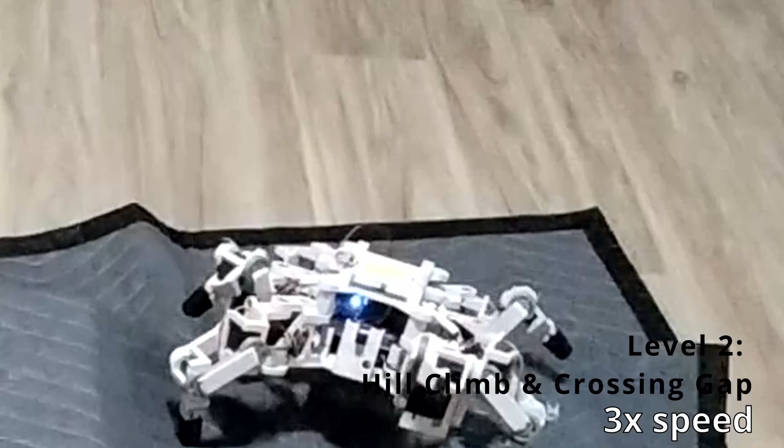I've fallen and I can't get up.

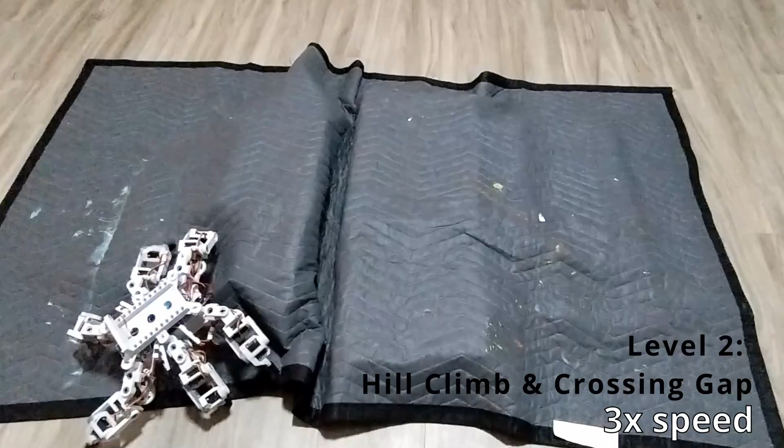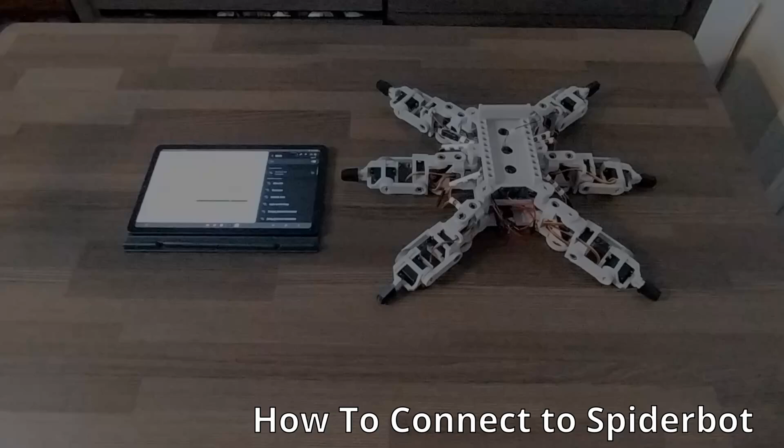The first thing you want to do is turn on your Spiderbot. Okay, so now it's on, you can see the lights are on. Then you wait for the Spiderbot network name to show up. In this case, it's ESP32 Spiderbot. Connect to it.

To check that it's connected, we hit the refresh stream button. Okay, now we can see the camera stream. So now we adjust the camera stream so we can see the full picture, zoom out.

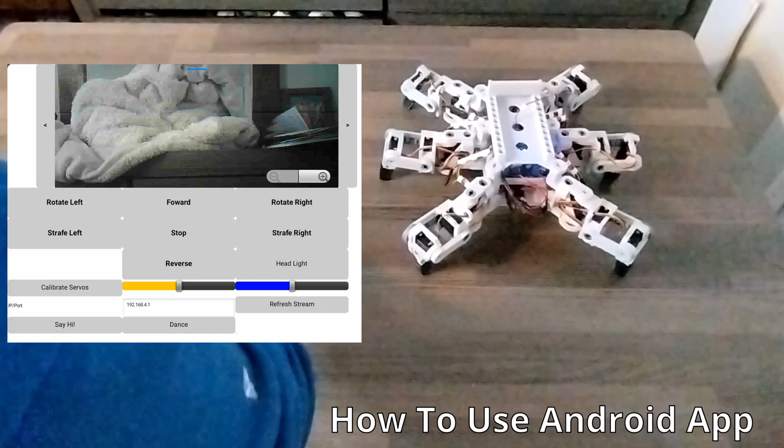Then we'll have to adjust with these arrows on the side, adjust so you can see the black bars. Okay, so there we go, full screen.

So you can also test out. The headlight button obviously turns on the headlight. The yellow bar here is for speed. You want to adjust this while it's stopped, otherwise it kind of glitches out.

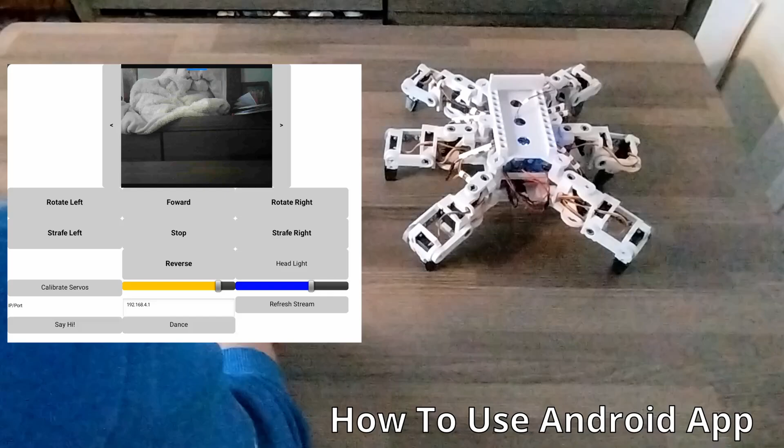The blue bar here is the walking height. You have to hit stop first to send the first command, and then it will adjust based on commands after that, so we can adjust the walking height.

Obviously there's forward, stop, reverse, strafe left, strafe right, forward, rotate right in place, rotate left in place. We have additional commands, say hi, and dance. Those are just fun actions.

We have a calibrate servos function, so that will set all servos from 0 degrees to 45 degrees. You can use this when you're assembling the Spiderbot to ensure everything is at the correct angle it should be.

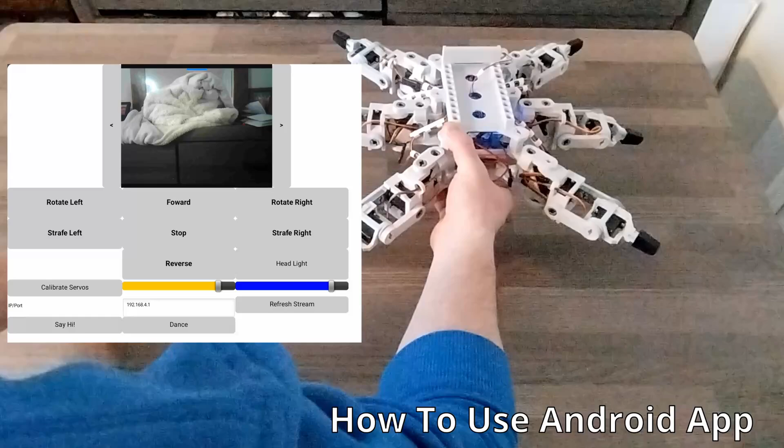Stop. And then at the bottom here we have the IP address, so that's the IP address of the ESP32. Since it's creating its own access point, it should be the same IP address every time, so you shouldn't have to adjust that.

This is the Spiderbot bill of materials. You can see here at the total, we have an estimated cost of 351 Canadian dollars. And you might think, well, that's kind of expensive, right?

Well, if you have 18 servos in a robot and a servo controller to control them, it's going to be kind of expensive, because if you cheap out on those components, your Spiderbot will not work very well. I've learned this from personal experience by just doing that - buying cheap servos, buying cheap servo controller boards. And yeah, it will kind of work, but it will just be not as good quality. It's just worth spending a bit more money on getting high quality servos and a high quality servo controller.

But anyway, so we'll just go through the list real quick of everything on it. Obviously we have the ESP32 cam, the microcontroller that controls everything. You definitely want to get one that has a programmer board with it, that's USB - it will make your life a lot easier.

The servo controller itself is the SSC32U, not much to say about that, definitely need that. So I use Goteck servos, they're like 2.5 kilograms of torque I think. They're really good servos, very durable, which is important.

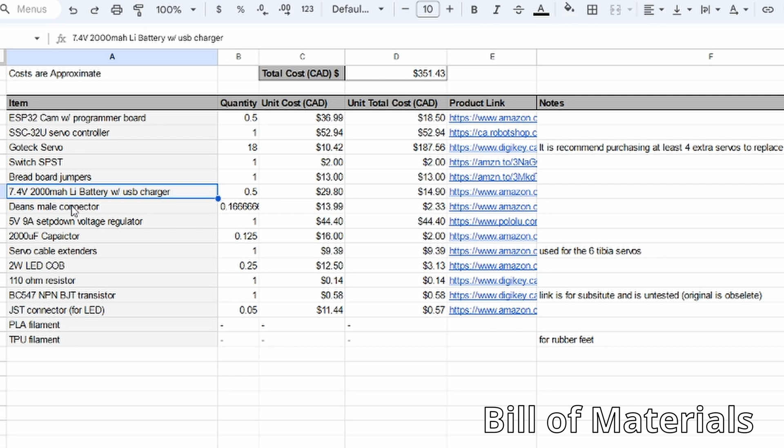We're going to need a single pole, single throw switch to turn the Spiderbot on and off. We're going to need breadboard jumpers, just various ones for various connections. I would just recommend buying a whole pack of them, because it's always good to have those for really any project. We have our battery, just a regular 2000 milliamp 2-cell 7.4 volt battery. We're going to need a battery connector, so that just interfaces with the battery.

We're going to need a voltage regulator, 5 volt 9 amp step down, and of course all the links here are right here for the items. We're going to need a capacitor, so that's for the bypass capacitor for the ESP32 cam, to make sure it doesn't brown out, especially with servos drawing a lot of power, potentially 18 of them.

Servo cable extenders, I recommend getting some of these for the tibia motors or servo motors, so you're going to need 6 of them.

2-watt LED - this is optional, of course, the LED light bar, but I think it looks cool and useful for nighttime environments to have the LED. So the resistor, the transistor, the JST, those are all supporting the LED, so that can be controlled by the microcontroller.

And of course we have our filament. So for this, pretty much the entire Spiderbot was printed with PLA filament, and TPU was also used, but only for the rubberized tips of the feet.

The tools used for this project were a 3D printer, to print all of the 3D printed parts, precision magnetic screwdrivers to screw in the servo screws, a soldering iron for building the circuit and making connections where necessary, wire strippers to strip insulation and cut wires, and pliers, which may be useful for assembling and disassembling the parts of the Spiderbot.

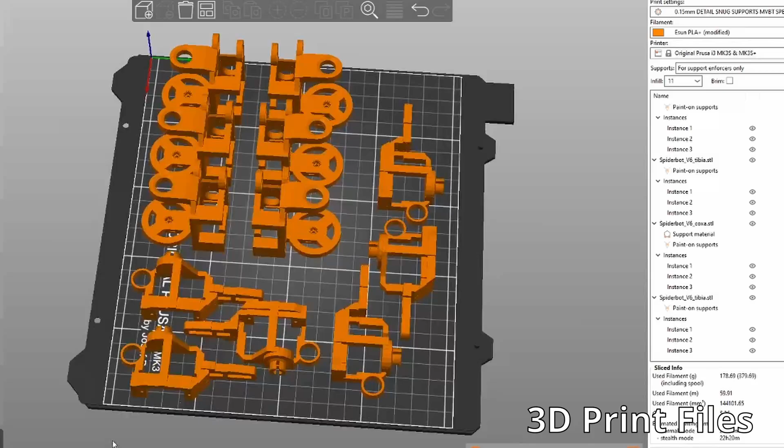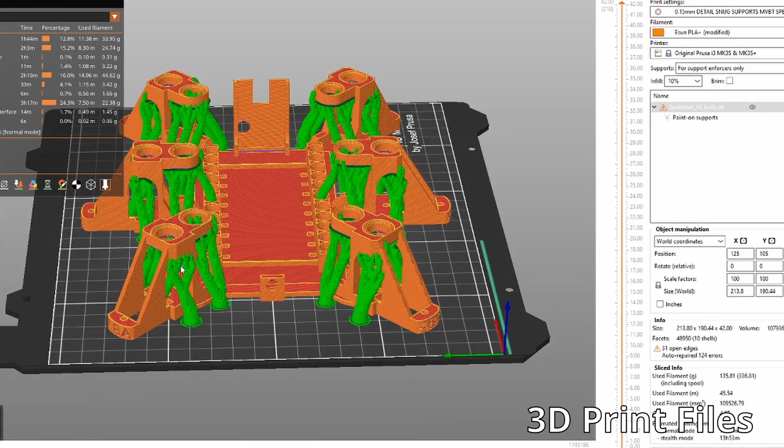Brief overview of the slicer files for 3D printing. So we have the leg pieces here, and we can see that we use some organic supports for the coxas, and then just regular snug supports for the tibia. Next we have the body of the Spiderbot, the main frame, with organic supports used for all these pieces. That's what I would recommend to do.

Here we have leg pieces, linkages, and connectors. All the connectors are round, so therefore they have supports.

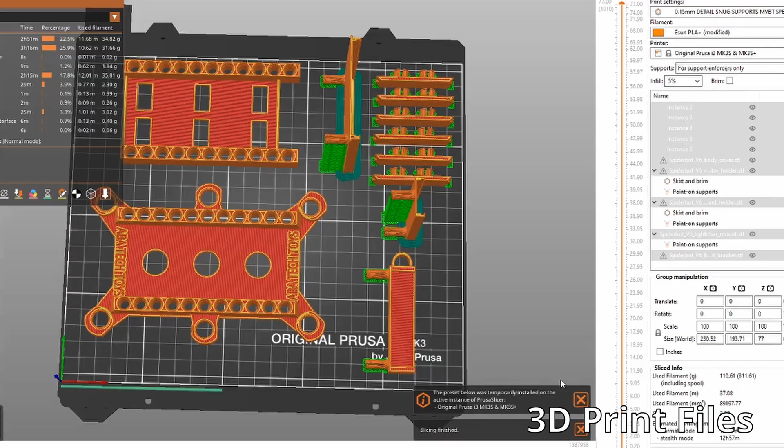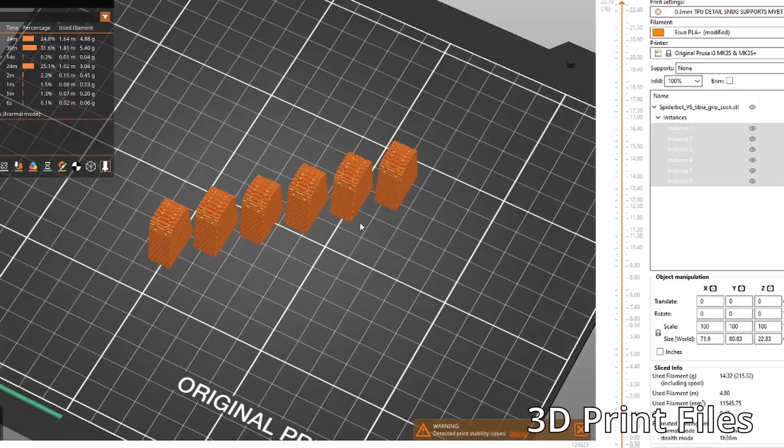Here we have the top piece, the electronics mount, some electronics mounts as well, and some linkage covers. You can see here the pegs are supported vertically for these electronics mounts. And last we have the tibia feet, which are printed in TPU, that's why they have their own plate.

On the document overview we have the 3D print list. This just has all the part names as well as what material they should be printed in and some printing notes. The files are available for download at Maker World, and the link is in the project overview.

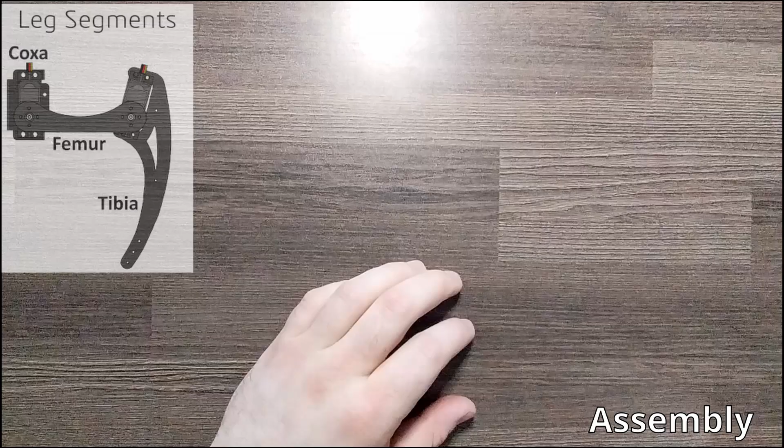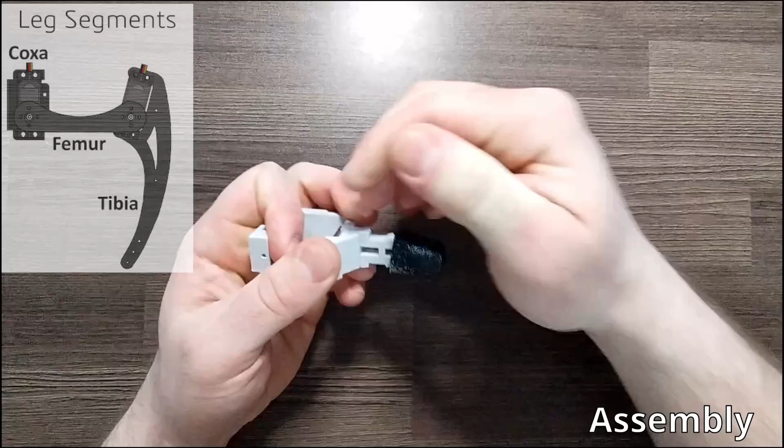All right, we're going to start with the assembly of one of the legs. This will be repeated 6 times, mirrored twice, so 3 legs will be the same, 3 legs will also be the same, but not all the same, only because they were mirrored left to right. First we want to start with our tibia piece, and we have our tibia sock, which just slides into there like this. It should snap into place and be very hard for it to come off.

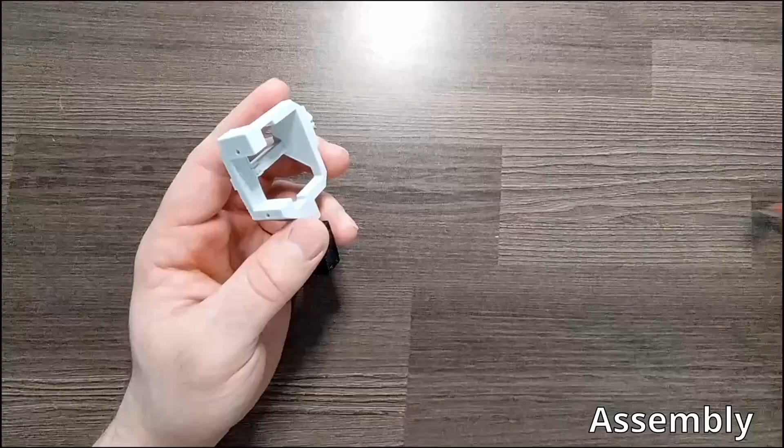Next we're going to want to put our servo in. We have a servo already prepared with a servo extender, just because the normal servo cable length isn't long enough only for the tibia. You only need these for 6 of these, for the tibia piece. You want to install the servo with the head to the top, furthest away from the rubber foot. It should slide in and snap into place, especially the first time if you've never done it before. The newer 3D model actually has a loop here for your cable to go through, just to keep it more managed, but it's not on this current piece - you would do that if you printed out that version.

First, we're going to grab our precision screwdriver here, and screw in the servo mount screws - these are the bigger ones. Okay, one down, and then the second one. They should line up with the hole that's already printed in there beforehand.

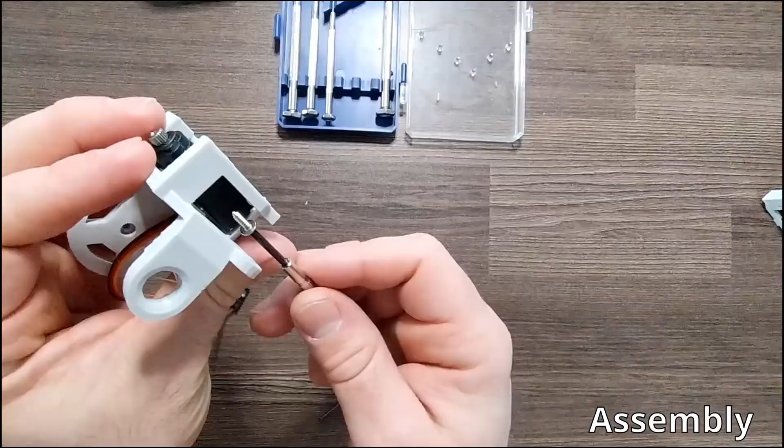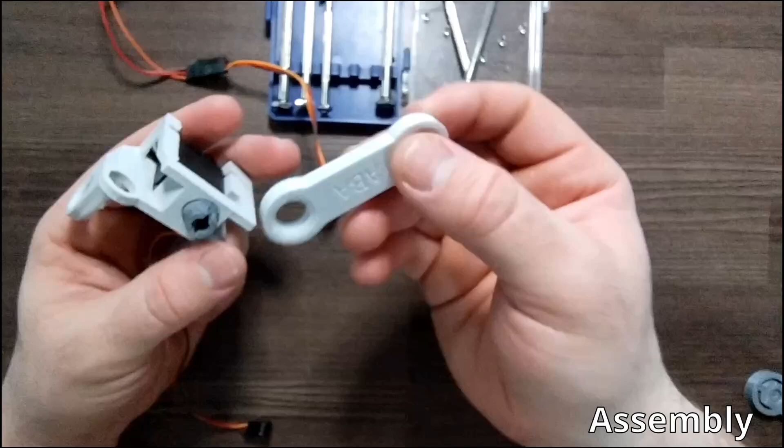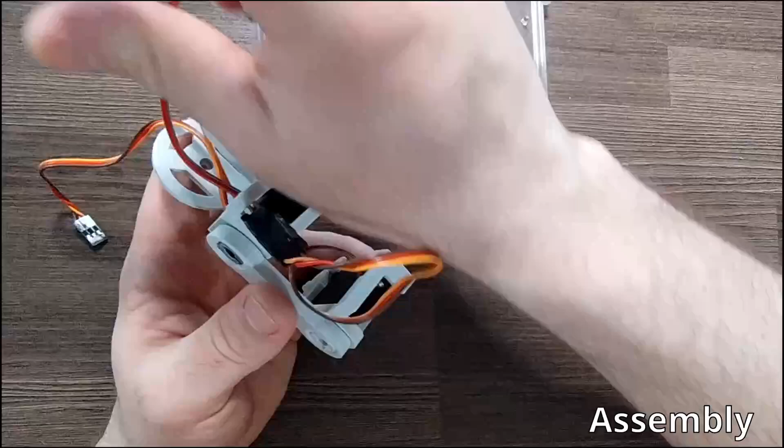All right, we have our servo installed. Get the femur connected, but we're not going to fully connect it, just on one side. We'll have one of the connector pins here that's going to go into the side of this coxa piece. Then we have a snap connector that goes onto this, and the other side of the snap connector goes onto the tibia. So for the tibia, you want to feed it through this loop right here - on the newer version, I think there's 2 loops, so just feed it through both of them. Pull it through, and there we have the assembly for now.

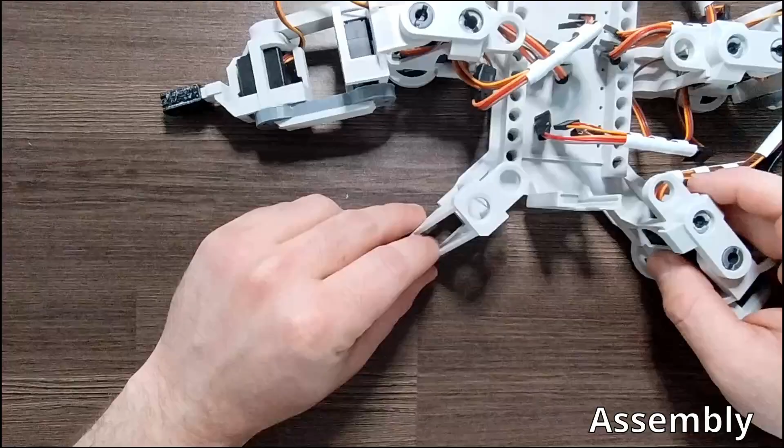The next step is to install the coxa servo on the frame of the Spiderbot. In this case, I already have all other 5 legs installed, but they're all mirrored. First, we'll take the servo and feed the end through this, whatever it's called. Okay, pull it through, you can see.

So now we're going to want to take the servo head and put it in this way. It should fit right into the square slot below - might be a little tricky to get in there. It's easier if you go this way first, this end, like this, and then push it down. It should snap into place. You can see here, the end of the servo head is closer to the edge. So now we'll just put our screws in, like before.

Then you want to put the screw through this hole to reach the hole for the screw. It's going to be a little tricky.

Alright, there we go, the servo is installed. Since we can't go any further with installing the servos, we have to assemble the body. That's because to go further with assembling the servos, we need to have them at 0 degrees in order to assemble them. Obviously, if your servo's not on and powered and set to 0 degrees, when you connect the parts on, 0 degrees won't be correct in terms of where the servo thinks 0 degrees is, so your robot won't work correctly, so that's important.

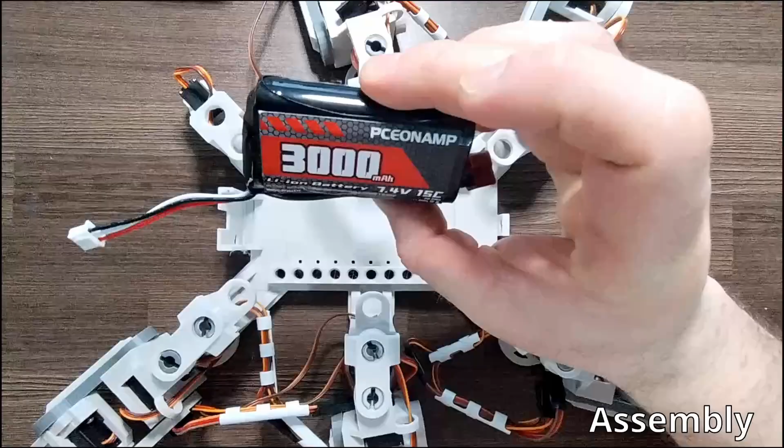Alright, so just imagine these legs aren't installed yet, obviously other than the servo on the end here. So we have our main body here, so we're going to want to start with our battery. This is a 3000 milliamp hour battery, with a JST connector for charging. I put this out of the front so it's easy to access. And here is the main connector we use to power the rest of the Spiderbot, so we'll set that in here.

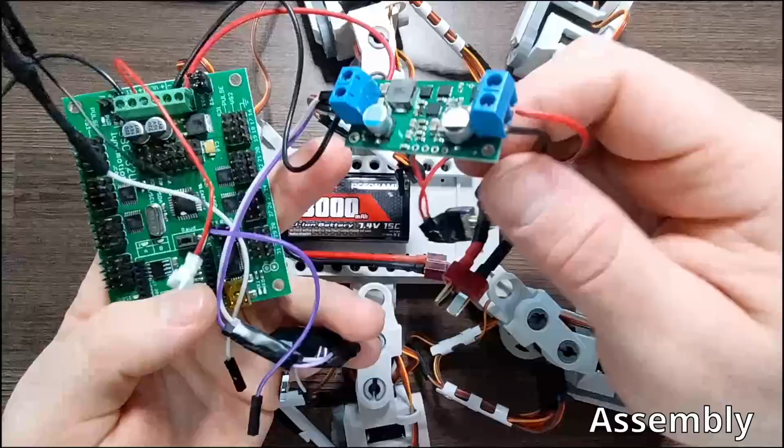I have the circuit already assembled. You guys can figure this out from the circuit diagram. It's really very simple, but I'll just show you real quickly.

So we have obviously the connector to the battery here. The positive is connected to a single pole, single throw switch, which turns the Spiderbot on and off. Then the positive and ground are input into this 5 volt 9 amp step down voltage regulator. Both the servo board and the ESP32 are connected directly to the voltage regulator.

I just don't have the ESP32 plugged in. For the ESP32 we have the bypass capacitor here, which can prevent brownouts. As you can see, we have it pretty close to the leads that connect to the 5 volt and ground on the ESP32. And here we have the BJT transistor that's used to toggle the headlight on and off.

So first we'll connect the connector to the battery, like so. Make sure that's off as well, make sure your switch is off, no need to have that on. The switch has a thread on it, so it goes through this little mount here at the back, you just push it through. And then we're going to put the washer and the nut that comes with it on, just to hold the switch into place.

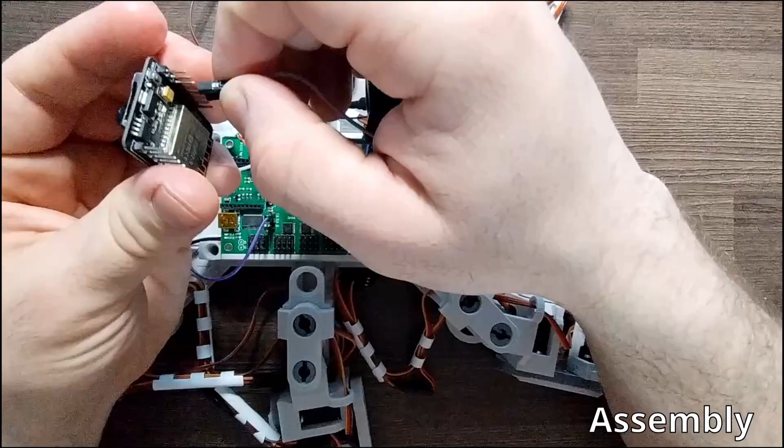Don't forget to also connect your VL and your VS pins, so that is these two right here. They just connect the voltage for the servos and the logic voltage together, because we're powering everything off 5 volts in this system. Okay, so next we're going to install our ESP32. We have the special wire here, the 5 volt and ground with the capacitor, going to connect that to 5 volt and ground on the ESP32, of course.

We're going to connect the receive pin of the servo board to the transmit pin called U0T on the ESP32. Then we're going to connect our BJT transistor to pin 4. Just a note, pin 4 also activates the LED on the ESP32. I use pin 4 because my voltage regulator for it burnt out, so it doesn't work anymore. But if you want to keep that flashlight on and put it on a separate pin, you can just connect it to probably pin 16. You'll just have to change that in the software, but it's no problem.

Okay, so once your 4 wires are plugged into the ESP32, it slides into the mount at the front. It should sit in there nice and snug and not come out.

Now the next step is to connect our servos to the board, and that will allow us to make sure they are connected at 0 degrees.

In this case, the orange wire goes onto the pulse, which is the inner row here. Now we're going to bring over our leg that we partially assembled, and we're going to connect it as well to the servo headers.

Might be a little hard to tell what's going on here because it's so small. Alright, connect that, connect that.

So if your ESP32 is connected, it will set the servos to 0 for like 2 seconds, but then they'll go to the default standing position. So this is where we have to connect our app for the calibration.

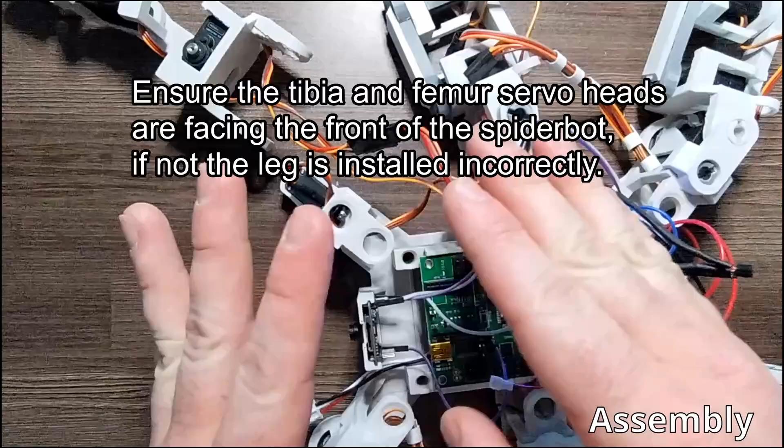Set it to 0. Now we can assemble the leg. Make sure all your servos that you're connecting are powered. That's very important, okay? So now all the servos are at 0.

So we're going to connect the coxa to its servo head hole, whatever you want to call it. This is important when you connect it because you want to make sure it's aligned with 0 degrees. 0 degrees in this case is going to be like straight out where the leg is pointing.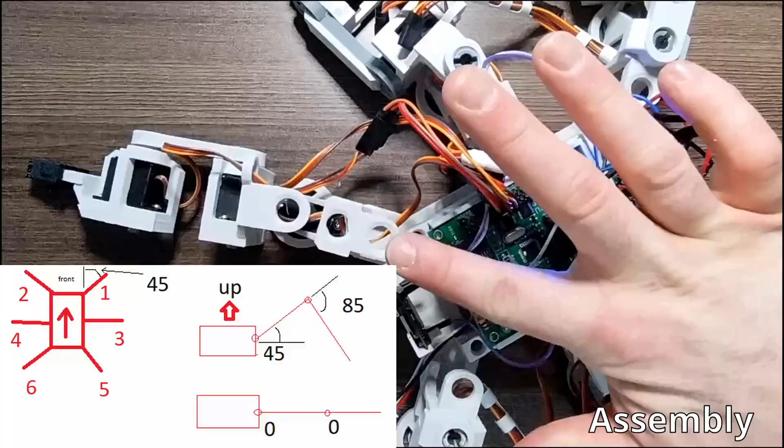So you can see here that from the body it's like 45 degrees off from the rest of it. So you want the rest of the leg to be straight with that. So I'm just going to keep adjusting it. You might have to pull it on and off until it looks good.

Also, when you're installing this for the first time, the fit might be really tight, so you might want to use a heat gun to heat up the part for maybe 1 second or so, just enough to loosen it, and then you fit it onto the servo and it will cool down, and then it will have a nice good fit, just if you can't get it to go on.

Okay, so that looks about 0 degrees, right? Okay, so the next part is to connect our femur.

Okay, so again, actually we're going to connect our coxa first, just so it doesn't fall off, because I feel like it's going to.

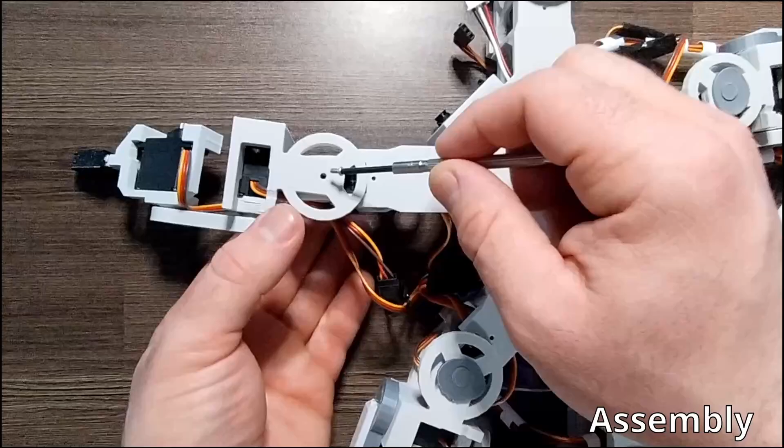So we're going to use one of these little tiny screws. These are called the servo head screws. Okay, make sure it's screwed in there nice and tight.

Then we're going to put this connector on. This protects the screw from falling out, because eventually the screw will loosen a bit since it's moving left and right with the servo. So I put this on to prevent the screw from falling out. So even if the screw is loose, at least it's not going to fall out and you'll lose it. Okay, so it should snap into place right there.

Okay, now the next part is to connect the femur. So again, we're going to want them at 0 degrees. In this case, 0 degrees is if the leg is straight out like this.

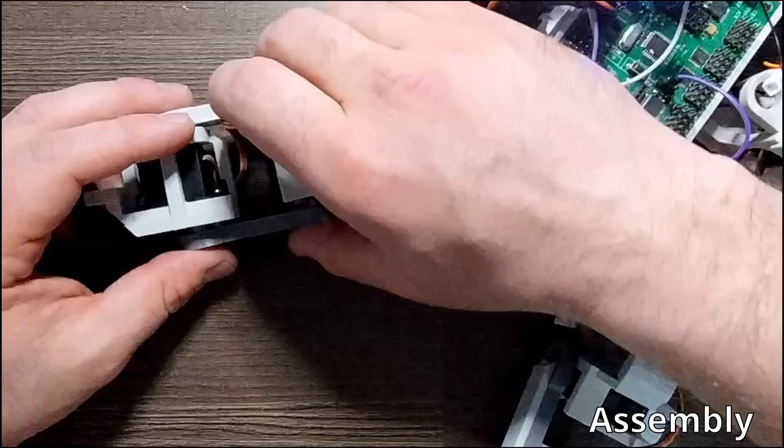Okay, so when you go to put that femur on, you want to make sure it's as straight as possible, because otherwise your robot will walk funny. Okay, so that's in place. Now again, we have to connect the 2 servo head screws.

Alright, so once you got your servo head screws in, you can turn off your robot. You don't need that on anymore. That's assuming you've installed all the legs.

So the next part is the screw covers for the femur. You can see here there's these 2 holes. This snaps into here, and this will also protect the screws from falling out if they got loose.

Next is the coxa swivel connector. So we have this guy and these 2 pins right here, and they snap into place like this. Then this end with the flanges goes around the static body mount, and then this connects to the top of the coxa. You can see here, it should freely allow movement left to right, no resistance.

So at this point, you should have all your servos connected, and your robot should be technically operational at this point, so there's not much left to do. For this demo, we'll just move ahead to the end.

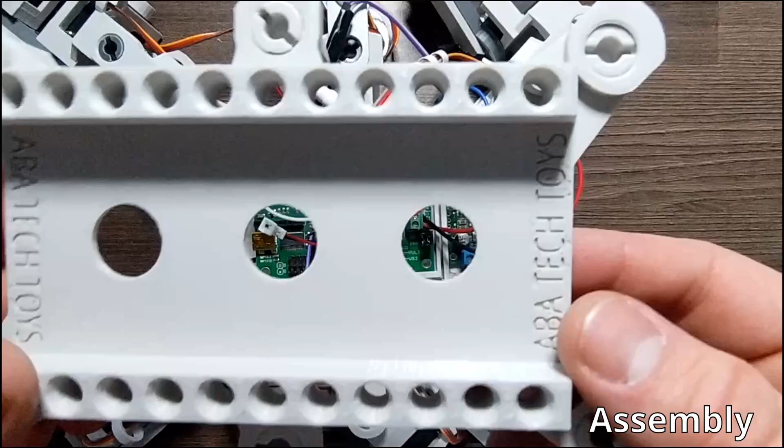Okay, so next we're going to snap the top plate on, that's the cover. But first we're going to put the JST connector for the LED in here, as such. And then it should snap into these 6 holes that we have here, ready to go.

Make sure they're snapped in all 6. All right, it's mostly assembled. The last thing is to put on the LED light bar.

So we have this 3D printed piece. So the LED, just like you can see, here's a slot, it just slides down into it. Let me see, yeah, like this.

And you can see I have the other side of the JST connector already connected, and I have it looped through this little loop here just to keep it intact so it doesn't get ripped off as easily.

So, okay, slide it back in. It's a pretty tight fit, so you really got to force it in. Okay, so then that snaps onto the top rows here into these holes like that, nice and secure. And then we connect our JST connector.

So we'll briefly discuss the electronics schematic. Overall, it's pretty simple. We have our servo board here with the servos connected, and what servo headers they should be connected to. And then we have the microcontroller, the LED circuit, the voltage regulator, and the battery.

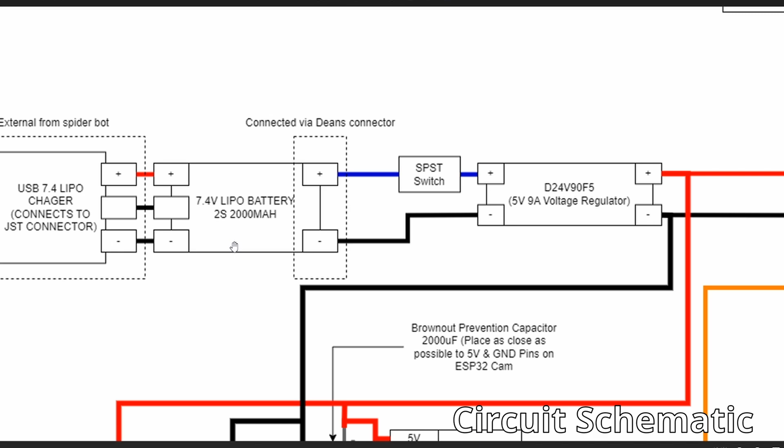So a more detailed explanation. We have the USB charger that comes with the battery that I linked in the bill of materials. So this is disconnectable, so this is external to the Spiderbot. Then it's connected via a Dean's connector, that's the special connector that's listed in the bill of materials. Then we have a single pole, single throw switch connected to our voltage regulator.

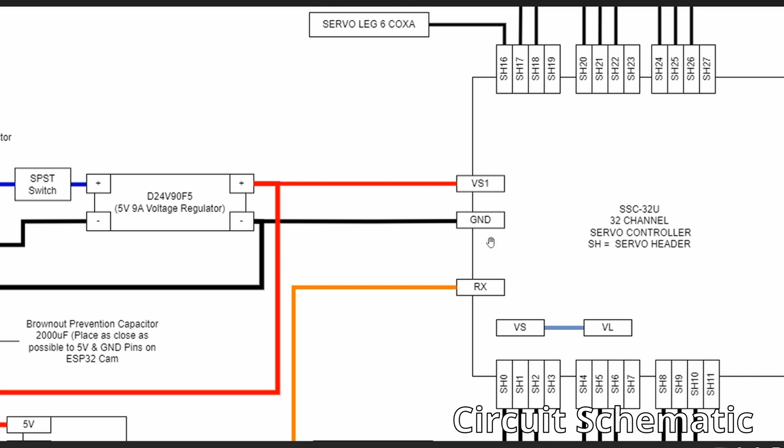So our voltage regulator, the output's connected to VS1 and ground on the servo controller board. And the 5 volts and ground is also connected to the 5 volts and ground on the ESP32 cam. And it's also connected to the 2-watt 5-volt LED. And here we have our transistor, which is controlled by pin IO4, along with its biasing resistor, 110 ohms.

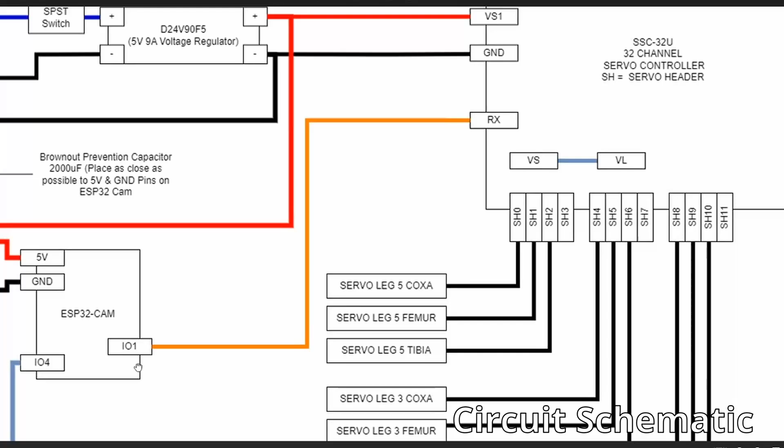The port IO1, which is also the transmit pin, is connected to the receival pin on the servo controller. So overall, it is a fairly simple schematic. And that was the design from the beginning, was to make this circuit as simple as possible to assemble, which I believe was completed with a 5-volt system in mind.

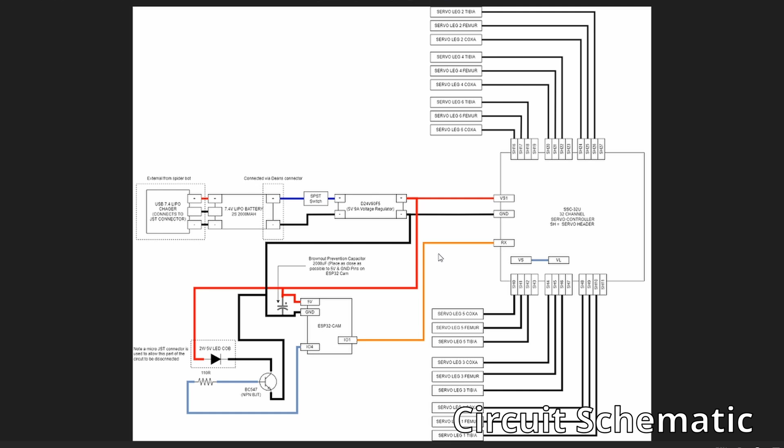So the voltage regulator powers everything. There's no need for 2 separate voltage regulators, one for 5 volts and then one for 6 volts for the servos.

But of course, if you don't want to edit the app, there's no need to at all. You can just download the APK file onto your Android device from the project overview, and you can just install it, and it should work right away. There should be no problem. But I would like to offer anyone that wants to customize their app should be able to.

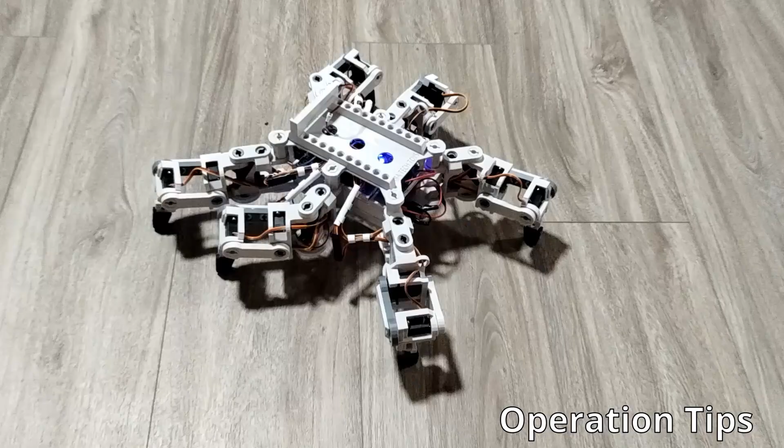Another thing to watch out for is make sure the wires of the servos are not getting bound in a part. It is possible for the wire to get stuck and possibly get sheared off, so just keep an eye that it doesn't happen.

Some ideas for expansion onto this build would include adding 2 servos for panning and tilting the ESP32 camera, so the robot could look around, because right now it's stationary to the body. I think being able to look around the environment would be useful.

You can also build custom attachments. If you look at the light bar, it's actually attached by a pin connector, so you could mount your own sensors or electronics to the top of the Spiderbot using the existing pins.

I think another improvement would be utilizing inverse kinematics to fully leverage the full 18 degrees of freedom that the Spiderbot has. For this project, I found that it was going to be too complicated to implement inverse kinematics, when a quick and dirty solution of programming the legs would work just fine.

But if you were able to implement inverse kinematics, it's much more expandable, and you can really do lifelike movements which would be very smooth, and you could potentially have much faster movement. But for the purposes of this project, I think the current solution is satisfactory, and that's proven by the videos of the demo earlier.

Also, adding a function for the Spiderbot to unflip itself would be a good add. To do that, you would just need to add a button in the MIT Inventor project, create a new action code, and then add an action in the software with the servo leg angles that would help you unflip your robot.